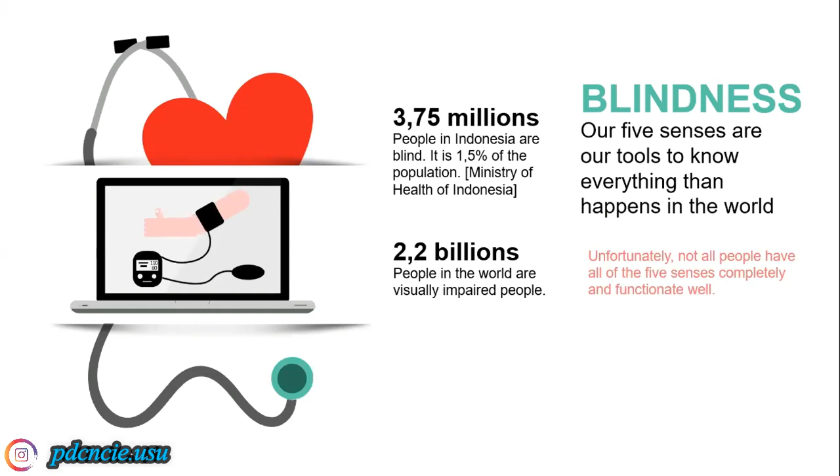So how can we bring this product to life? Firstly, we need to design it. Product design methods are all the procedures, techniques, and tools representing certain activities used to design a product.

There are two types of design methods: creativity methods and rational methods. Rational methods emphasize a systematic approach, aiming to improve the quality of the final product. Nigel Cross is a rational method that can be used to improve product functionality and value.

There are 7 steps: clarifying objectives, establishing functions, setting requirements, determining characteristics, generating alternatives, evaluating alternatives, and improving details.

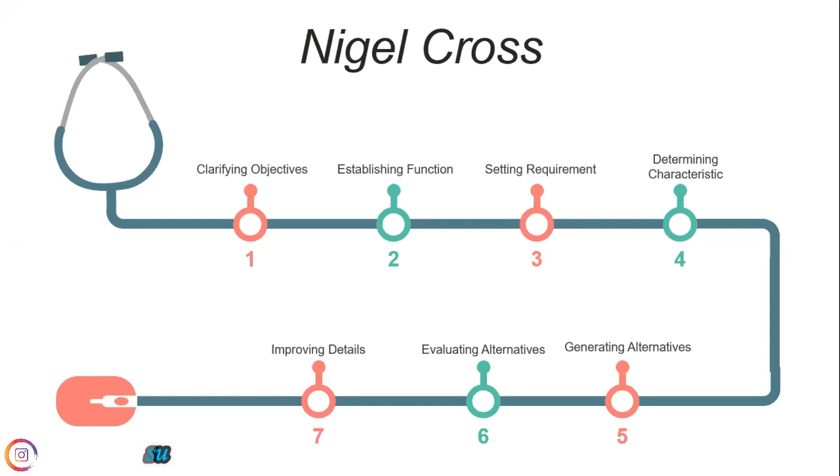Because the starting point to decide the problem is not clear enough, it's often difficult for an engineer to give a complete and clear objective of design. However, a designer must have some objectives in their work. Objectives tree method outlines what the design aims to achieve.

As you can see, there are 3 sub-objectives that we look at: design, material, functionality. I will take material as an example. There are 2 objectives in its handle and material of additional function.

We have seen before that there are many objectives. Each of those objectives can create some problem in the process of design.

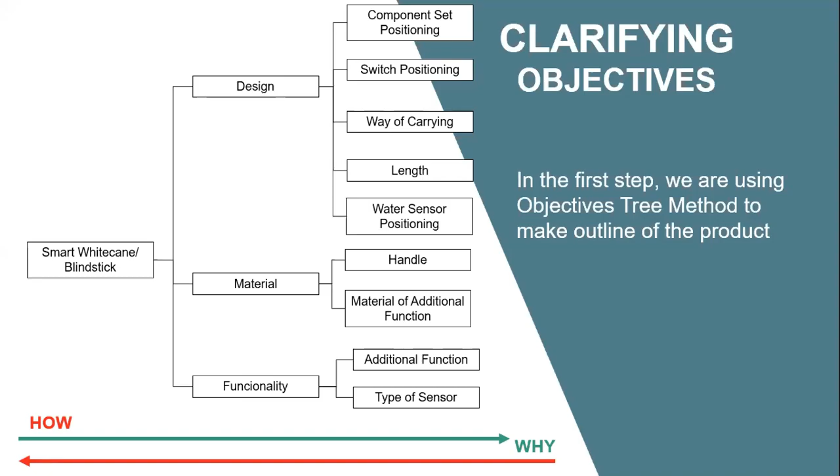We are using the black box method to describe how to convert input to output. The inputs are machine, material, tools, methods, energy, and information. After that, we transform it in steps into the output: smart blind stick and waste.

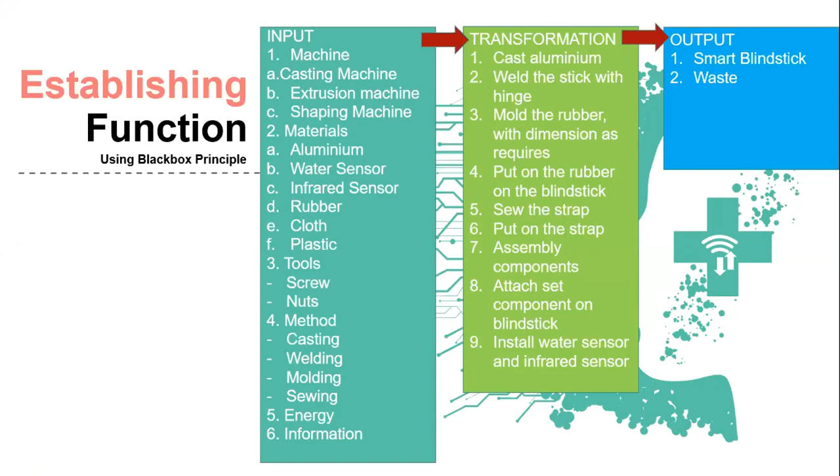There is always elimination in designing a product. Requirements consist of product specifications. After doing a survey on our target market, we found that all the attributes we discussed through brainstorming are fulfilling customer needs.

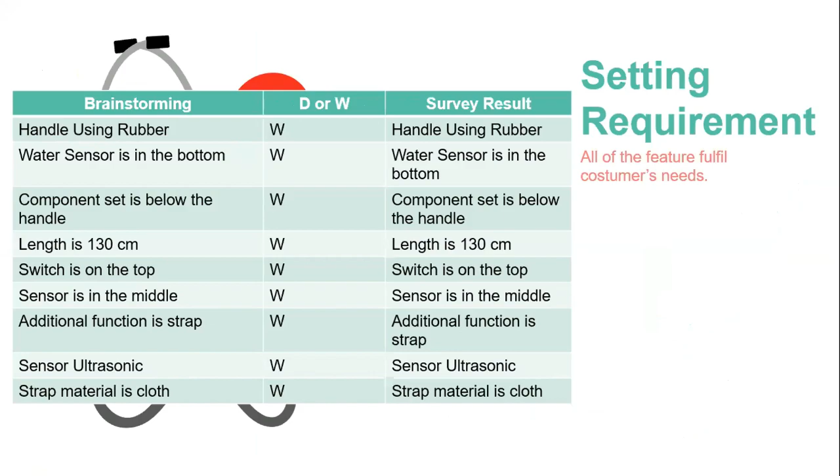It is possible to have conflict or misunderstanding between the engineering team and the marketing team, as each team puts too much focus and interpretation that is different from what has been decided.

Evaluation assesses the holistic value or utility of the designer's purpose. However, different purposes can be considered more important than others. Therefore, it is important to have many weighted objectives so that alternatives can be evaluated and compared.

The weighted objective method is a tool to evaluate design alternatives. This modification aims to improve product performance and reduce product cost, among other goals.

This method focuses on function and purpose to create a gap between value and cost. We eliminated rubber on the hand grip material, changed it to plastic, and reduced the amount of material used.

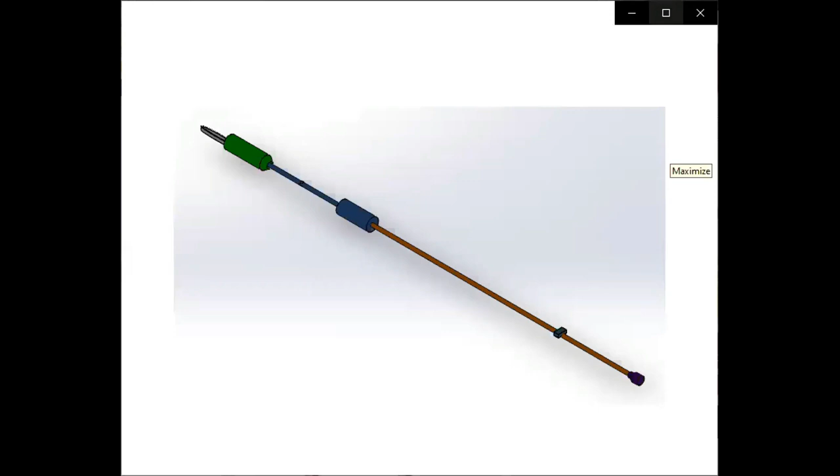Okay, Team 3B, please answer the question. We haven't put the picture of our product in our slide. Our product is an innovation of the white cane or blind stick that is a commercial product in the public. What is the difference? We made some changes: we made a box in the blind stick, and that box consists of a sensor, vibrator, motor, and battery for the operation of the sensor. This is what makes us different from other commercial products.

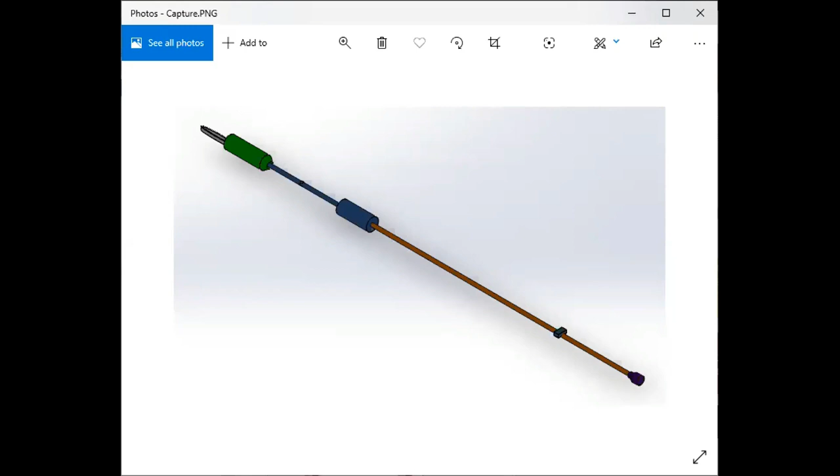Okay, thank you. Is there any question from Team 1E? Excuse me moderator, can I ask another question about the product? Yes, please. From what I see, your product looks like an egrek used to harvest palm, and you state that your product uses motors. Yes. So how can blind people...

Thank you very much. Sorry, what is the question? How do the blind people know when they have to charge, because there is no identification for the battery? How to recharge the battery? I think you want to ask that, is it true?

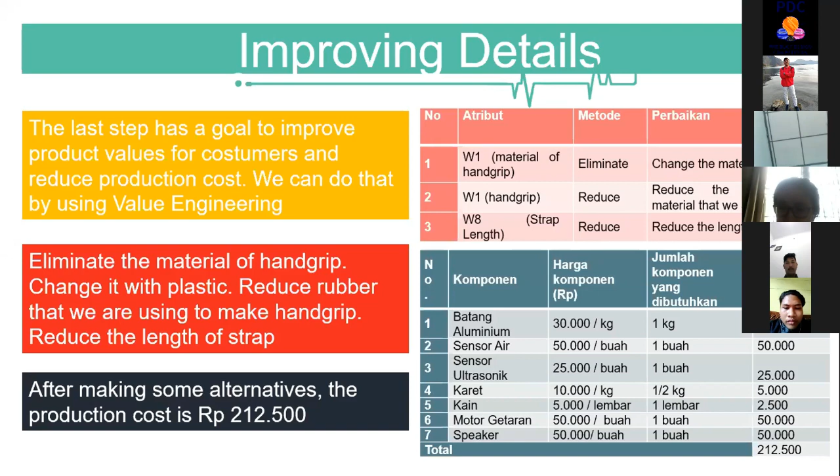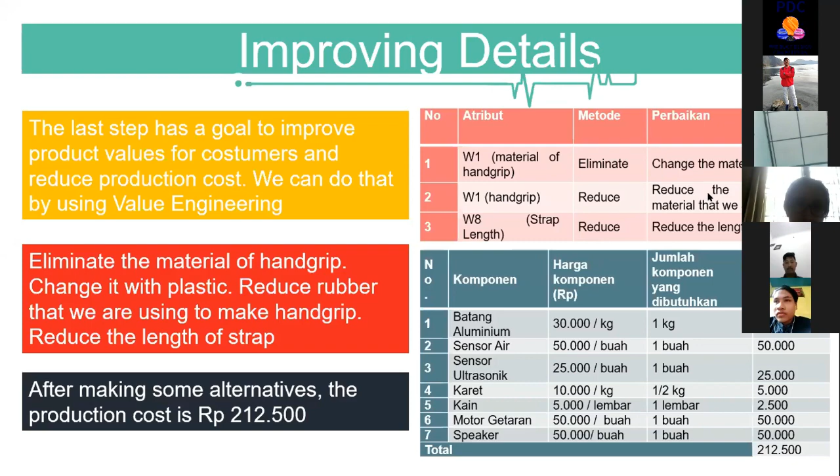I'm quite interested in the product, but I'm still a little confused about the motor used in this model. If we refer to the product, where is the location of the motor in the model, in the prototype? Okay, that is my question.

Team 3B, please answer the question. So the motor, the vibration motor, is part of the component set. We positioned it below the handle. For blind people, when they want to go somewhere and the stick may be too long, they can still fold the lower part of the blind stick, so the dimension gets shortened.

Okay, can you show me the product, the model that you already developed? Okay, I will show you.

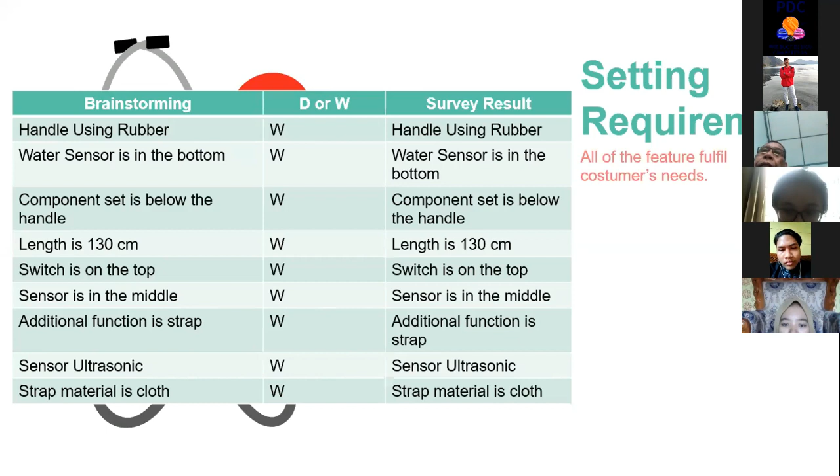Where is the product? I didn't see the picture.

Let me explain the product, the component set. The position is below the handle, and we have some switch on the handle, so we can switch on or off the sensor function. Then, in some distance from the ground, we make some sensors that can detect any obstacles in front of the user.

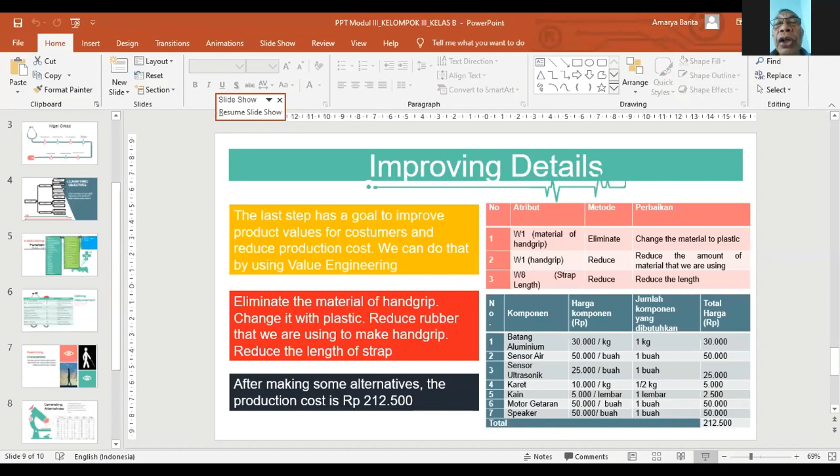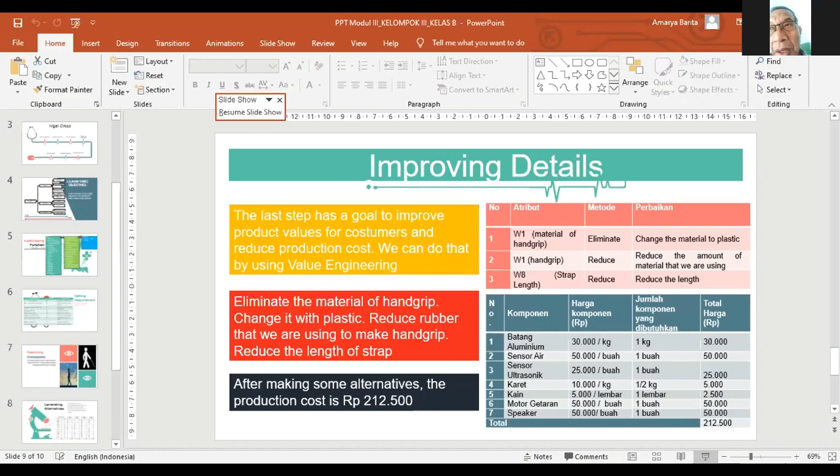Okay, let me answer. You have to design it properly. And the third question: when the road is busy, how can he survive to get to the next road? What signs? Because this is Indonesia, not Europe. So you are asking how blind people can cross the road, right? Yes, because you have to design it for Indonesians, not Europeans, because people here can drive however they want.

Yes, sir, firstly I want to answer about the handle. The handle is made from cloth. What I mean as a handle is some rope that we can take. It is in your picture. You don't have the handle. It is the handle of the blind stick, sir, and this is the hand grip. So the difference between the stick, grip, and handle is the material and dimension that we have.

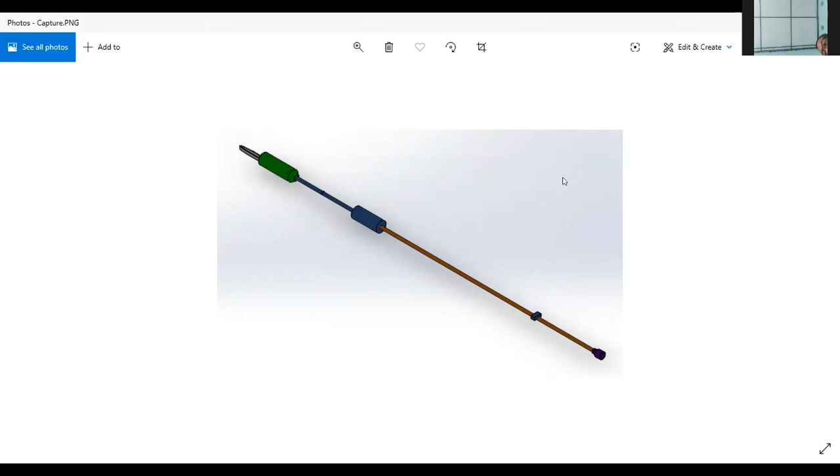Okay, that's all. Okay, thank you to our judges, and thank you to Team 3B.